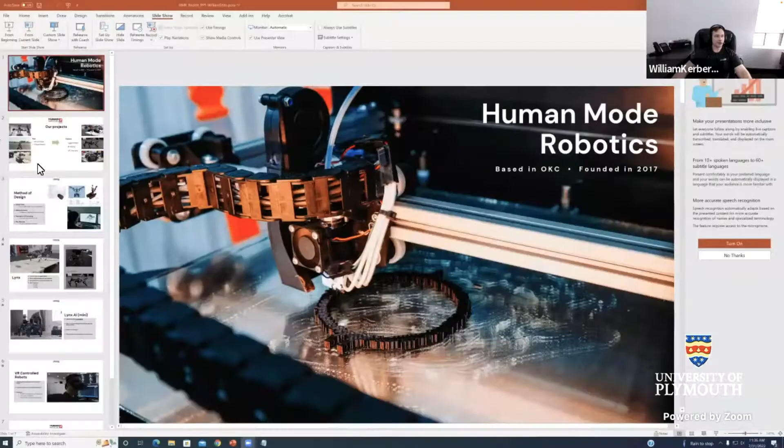So like I mentioned, our task at Human Mode is just working each year to make incremental improvements on the physical bots and also on our synthetic intelligence.

We build a lot of prototypes. It's very iterative—we just move on to the next after the last, and each one is meant to challenge us and teach us something new. We don't really put a lot of focus on aesthetics on these robots; really, it's just about problem solving and forcing ourselves to improve.

In the past, we started our robotics program with these robots on the left. They were really interesting because they were all controlled through VR, so we called them the Gemini, because they mimicked your movement whenever you controlled them through VR. VR is actually a really big part of our company. In fact, the other team at Human Mode has been working on an immersive VR metaverse called Massive Loop since about 2018. So this theme of extending your presence into a physical or digital avatar runs really deep at our company.

And we'll likely continue to improve it in our robots. But more recently, in the past 18 months, we tried to focus on two specific areas: one was improving our ability to do simulation, so that we can iterate our design in software instead of just through hardware, trying to approach a one-to-one match between our physical and the simulated environment.

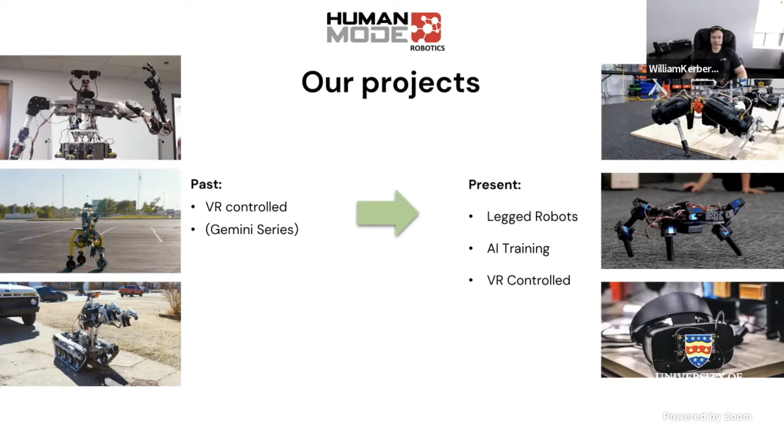I'm going to go ahead and turn it over to our team: team lead Jonathan Gilmore, Mehul Kumar in AI, Bao in mechanical, and Jay Choi in software, so they can describe these projects in more detail, starting with Bao and mechanical.

Thank you, William. So I'm the mechanical engineer. I oversee the design and prototyping process. I want to start off by giving an overview of our design process.

The cornerstone of this project focused on making a robust and lightweight quadruped system. The goal was to have the weight distribution focus on the upper body of the robots, creating a low inertial leg for the quadruped—hence the actuator being assembled at the shoulder for all three joint movements on the leg.

We also use CAD and simulation programs in our process. Regarding the CAD, it's used to find the ideal arrangement for the components. Essential criteria like the material property, the moment of inertia, and the center of mass all play an important role in the assembly of the quadruped. Simulation was also done on the articulated model to prove that the movement is successful.

When it comes to producing the parts, we went with 3D printing and CNCing for custom components. We also used some 80-20 extrusion components for ease of assemblability, which was essential when it comes to buying off-the-shelf components. When it comes to actuation selection, we wanted an actuator that has the ability to backdrive and have compliance as well.

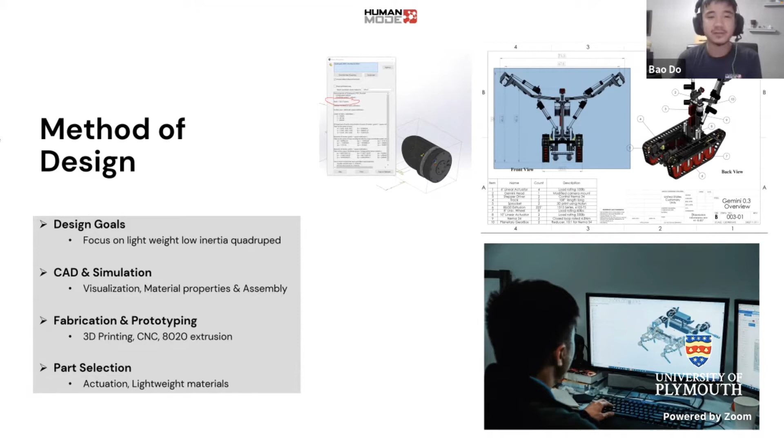Okay, hi, I'm Jonathan. I do the electrical and low-level software. So the first, this is the first Lynx we built. This is the electrically actuated Lynx that uses the MIT Cheetah motors, and we built this primarily as a platform just to learn about what it takes to walk on 4 legs. We built it to just experiment with different algorithms and basic gait patterns.

The next robot that we built was the hydraulic Lynx, and that had pretty much the same goals as the first one. We built it just as a platform to experiment with. We also wanted to try porting over everything that we learned from the first robot onto this second, totally different platform, and see how much of it carries over. And we also wanted to experiment with hydraulic systems.

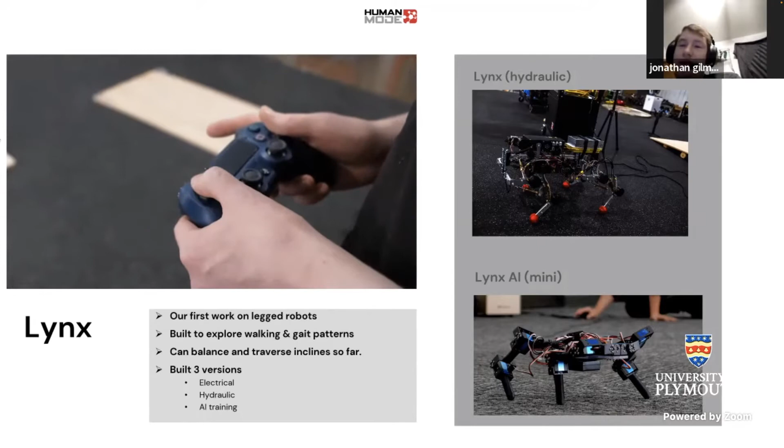The third robot is just a really small, lightweight robot, but we wanted it to be really easy to fix and repair. So it doesn't have anything special on it hardware-wise. It's mostly just your standard off-the-shelf hobbyist servos.

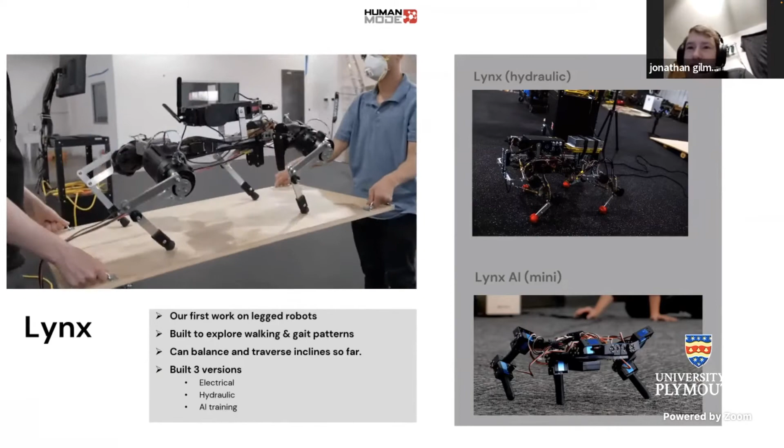We wanted this one to be able to be repaired easily, because as opposed to the first two, which are running on manually coded algorithms with inverse kinematics and pre-programmed gait patterns, this third one is running entirely off of AI. There's no inverse kinematics, no hard-coded gait patterns or anything like that. It's just pure AI controlling the servo angles.

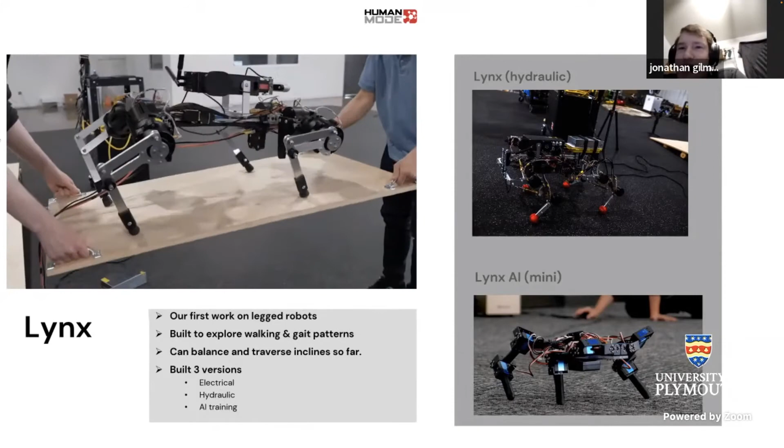So, you know, it's AI, it does some unexpected things sometimes, so we didn't want it to just freak out and break. And if it did, then we could fix it easily. So I'm gonna turn it over to Mehul, and he's gonna get into more depth about that.

Hey, so I'm Mehul. I work with AI at Human Mode. In the past, if you've seen our presentations, we've used AI before, but it was mainly as a tool to help with navigation and do some object detection, collision avoidance. But now our goal was to build a fully autonomous system that can learn to walk on its own, with no user input.

It's able to solve hard problems, do navigation, go over obstacles, and also be modular, so that we can take the same system that we have built and use it in the future to train different robots. And it's not just for locomotion - we can also train it to do complex challenges in simulation.

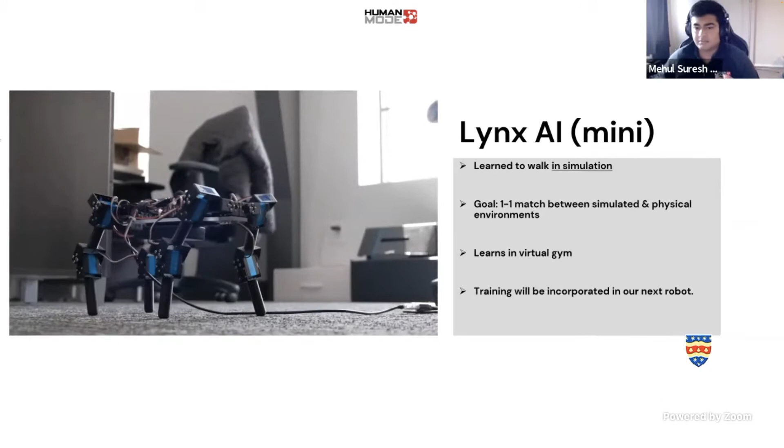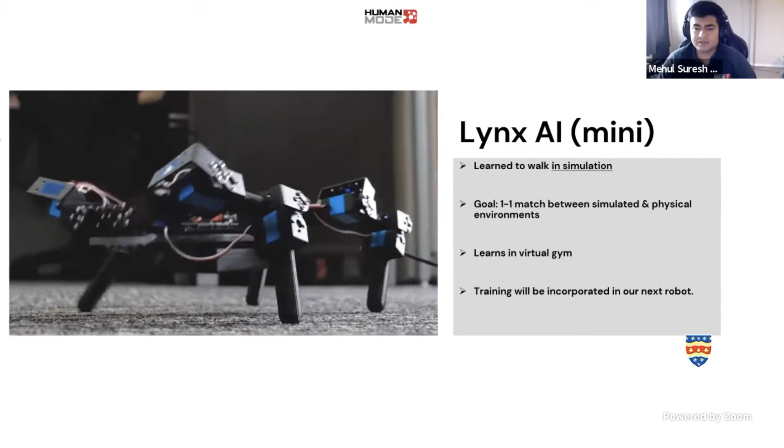So the first step was to build or find a game engine or simulation platform that can closely replicate real life, as close as possible, 1:1. One of the challenges in doing that was to match the friction between the floor and the feet of the robot, and there's a lot involved in that, with restitution and dynamic static friction. Some of the other challenges were the center of mass of different parts - when you just bring in a 3D model it's different from creating an actual robot, and the center of mass of those parts might not be the same.

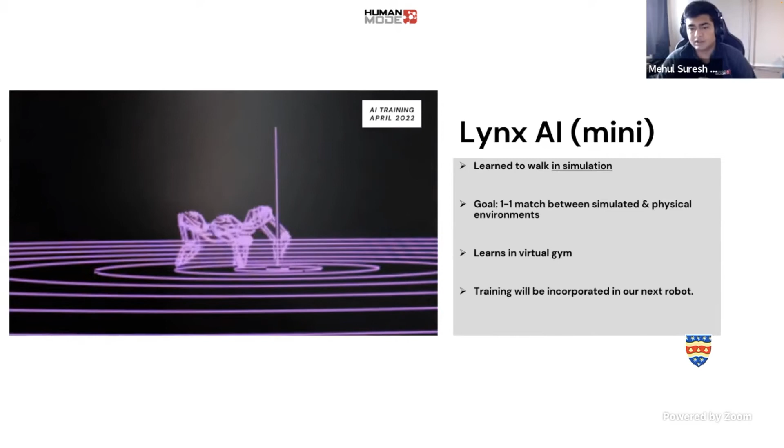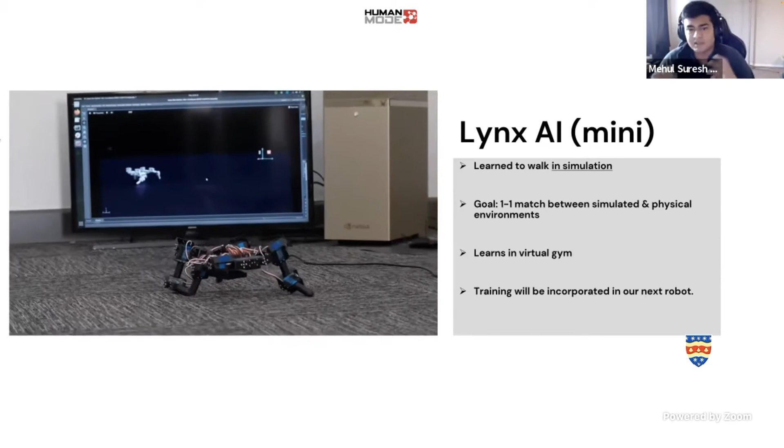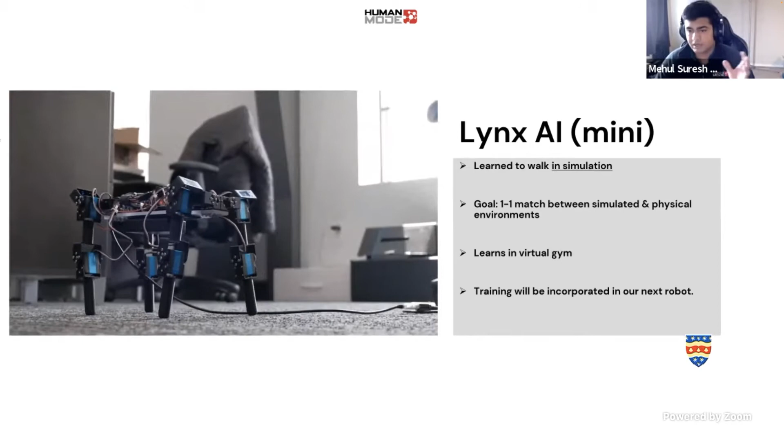Another problem was with game engines and other simulation platforms - things kind of seem blown up, not 1:1 scale. Things are kind of extra in those simulation platforms, they're built to have huge explosions, do massive flips, so they don't really match the real world 1:1. So our goal was to explore different platforms and find the best one we can use to do some simulation, and to build a virtual gym with different obstacles, navigation, and different challenges, so that we can train our robots in there and see what they can do.

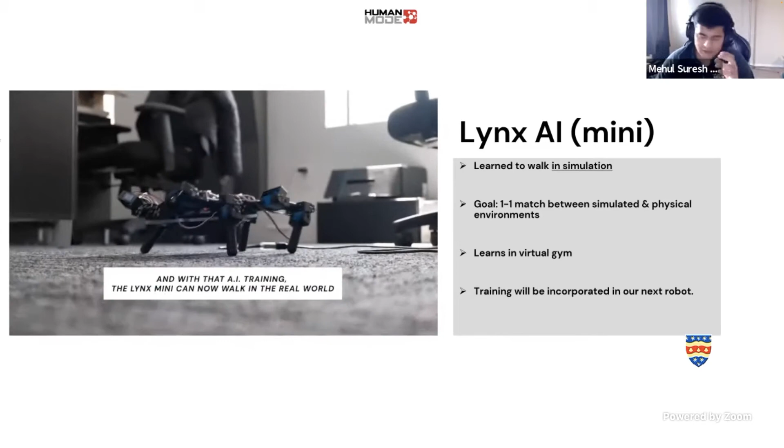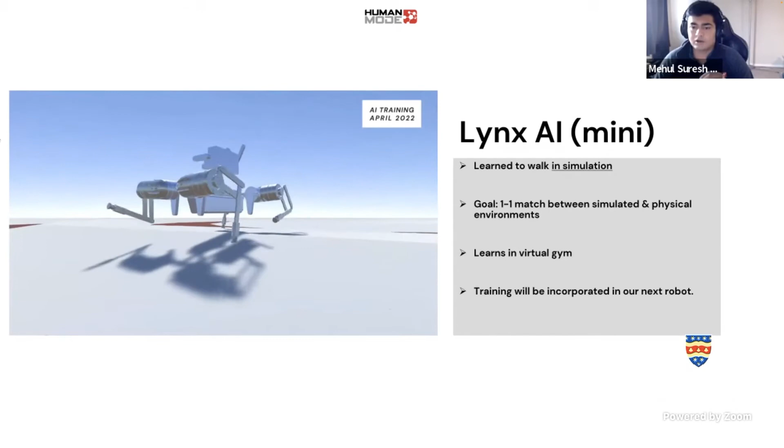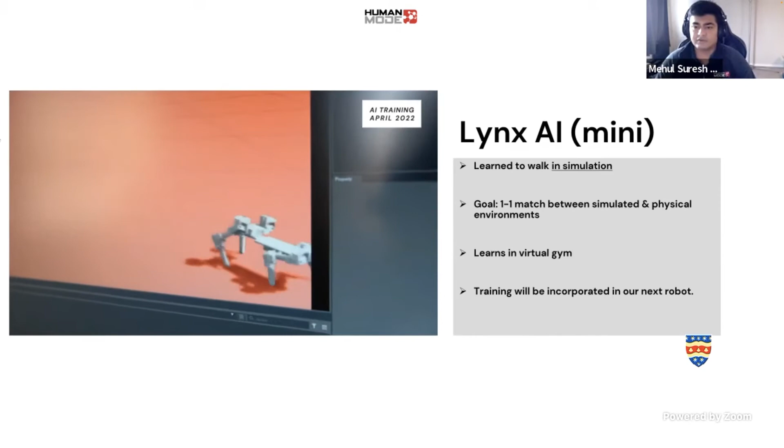So you see the Lynx mini walking, that was the end result of our experiments. We've trained a reinforcement learning model to learn to walk from scratch and get over obstacles and navigate and turn based on what it needs to do. This will really help us in the future when we have more complex robots that cannot, you can't really expect to write 900 lines of code per action.

So now I'm going to revert back to William to talk about our advancements in VR control.

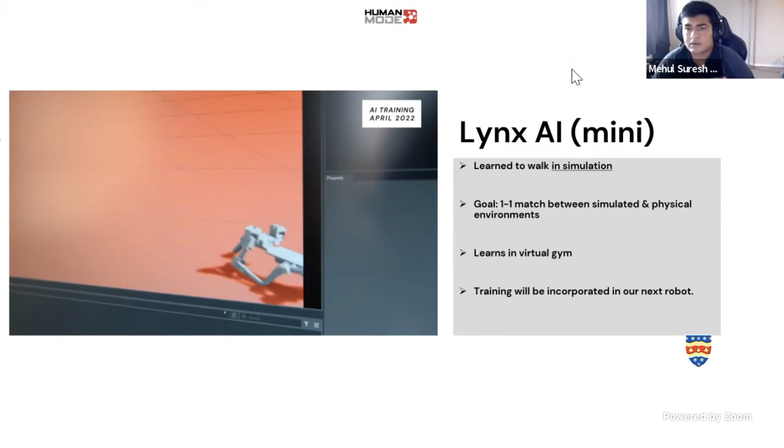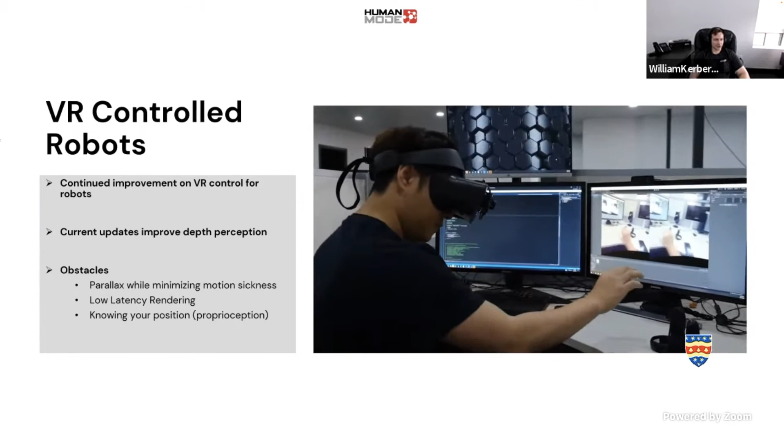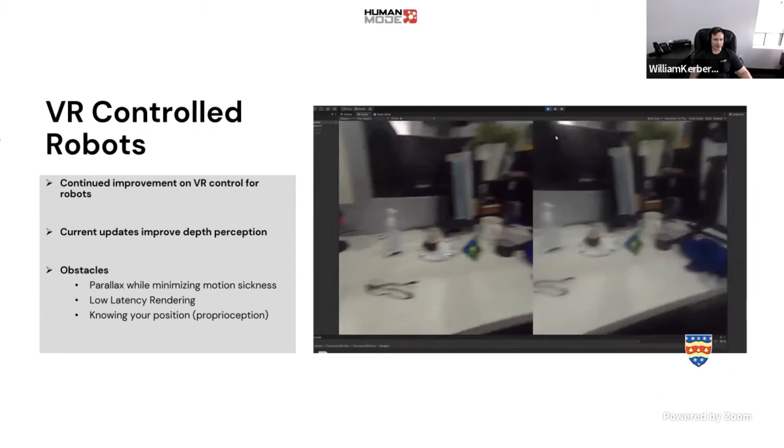We continue to work on improvements in VR control. The early version started with what we called the mech suit, which was sort of like a VR, mocap suit primarily, but also with the goal of really controlling physical avatars. One of the issues we had back then was depth perception, because the vision was basically mapped to a flat plane, so we couldn't utilize it for grabbing things remotely. But we've continued to update that, and you can see in this experiment we have a pretty good ability to grab and manipulate items remotely while viewing them through VR.

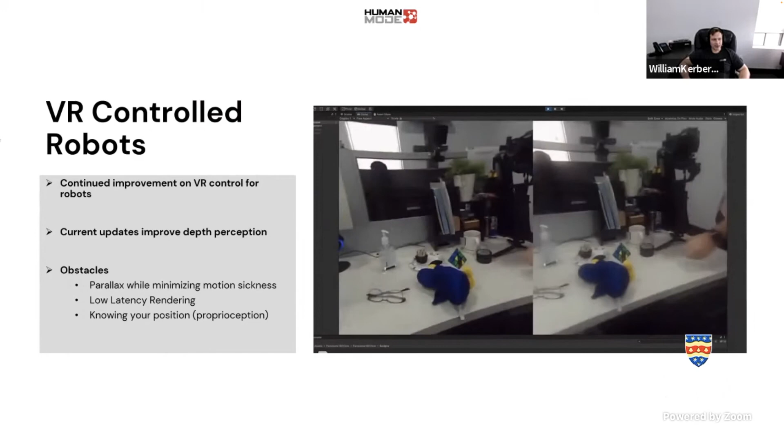So Jay would normally be talking about that. He's not available right now, but we continue to advance that side of it in all these features.

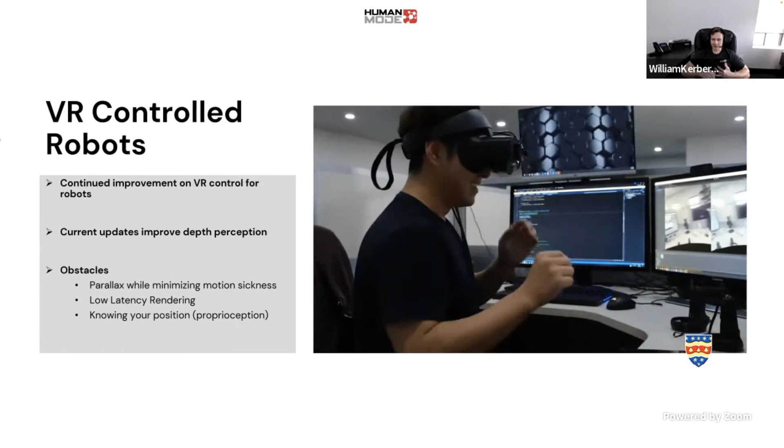So we have trained walking, VR control remotely, and also just general walking and gait. They'll all make their way into our next prototype, which we'll start working on in early August. So we're excited about that, and that's pretty much what we've been up to.

So I don't know if there's any questions.

Yeah, well, thank you guys so much. I mean, you guys have come a really long way, even from the presentation you showed us last year. So this has been really fantastic to see your progress here.

Yeah, I had a question. Never mind, we have some questions in the chat.

Are there a lot of robotics enthusiasts in Oklahoma City? Well, we're here, and we're enthusiastic. We're enthusiastic enough for everyone. So I think we'll help spark that, that's our goal. Good, yeah, that's good.

And then another question is, are you guys working with NVIDIA Isaac at all for your simulation environments?

Yeah, Mehul can talk more about that, but definitely, I mean, we use them all. We use Unity because we have a lot of familiarity with that. We use Isaac Sim. We basically spent the last 18 months exhausting research in them, Mehul can talk more about it. I think Isaac Sim worked the best for us, but like William said, we have tried pretty much everything else that's out there. I think Isaac Sim is pretty good. It has some issues in Windows, but in Linux it works pretty well.